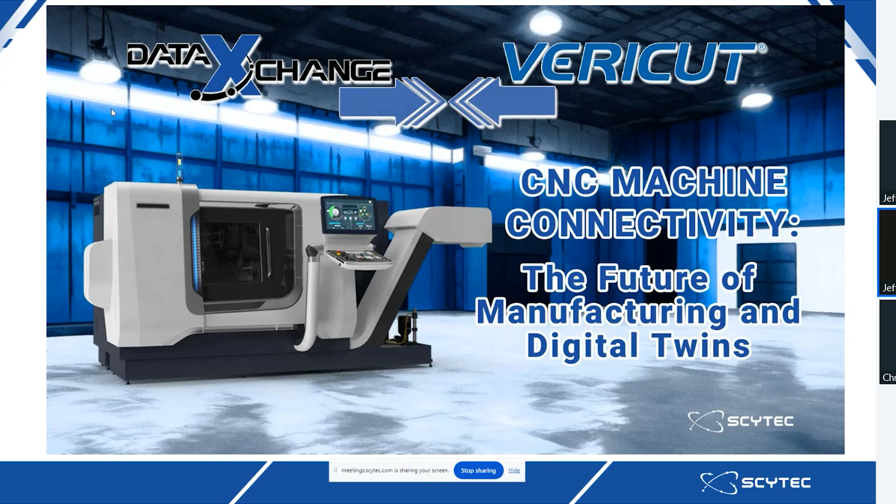So thank you all for joining us here today for a joint webinar between Scytec and CGTech concerning the integration between DataXchange Machine Monitoring and CGTech VERICUT, the standard in digital twin simulation verification. And the topic of this morning's webinar is going to be CNC machine connectivity, the integration between the aforementioned two software platforms I just mentioned, and what that holds for the future of manufacturing and digital twins.

So for those of you that are new here at Scytec, we have a monthly webinar concerning something related to machine monitoring, smart factory technology, etc. Normally about DataXchange related topics, but this morning, we actually have a very special guest with us from CGTech, Mr. Jeff Voegele, who is their VERICUT product specialist. He is going to be doing some demonstrations about the three different modules inside of the CNC machine connectivity integration, which include Precheck, CNC machine monitoring, as well as Postcheck.

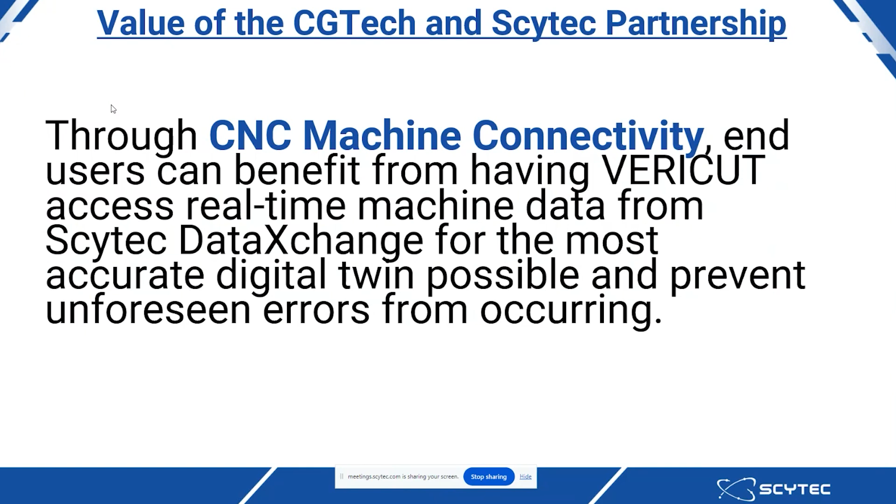Now, even with VERICUT, you're going to be left with some questions that still need to be answered, such as, the simulation ran without issue, but then when you got to the shop floor, some problems had arisen. And let's say you weren't even on the shop floor at all, and when the NC program had run, did anything negative happen? As well as other questions like, is my CNC machine running as fast as it can? Is it running at full capacity, 100%? And how much longer until the part is finished machining?

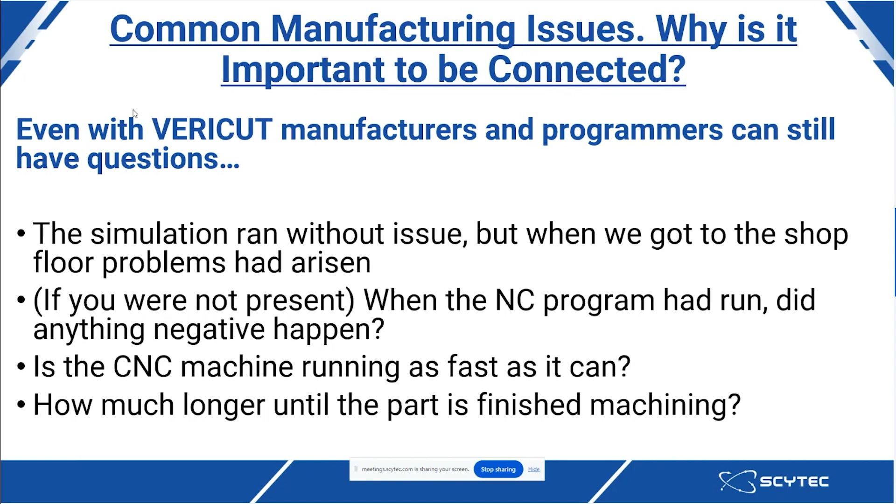Some other questions include, were tools in the machine set to the correct lengths? Were any e-stops or negative unplanned events, did they take place while you were machining? Were feed rates or spindle speeds modified? And was the correct NC program or subroutine applied? Now, managers, NC programmers, and owners themselves are going to be asking different questions as well. And that could be, was the machine set up correctly to even run the job in the first place? And if ran on a different shift, did anything negative happen?

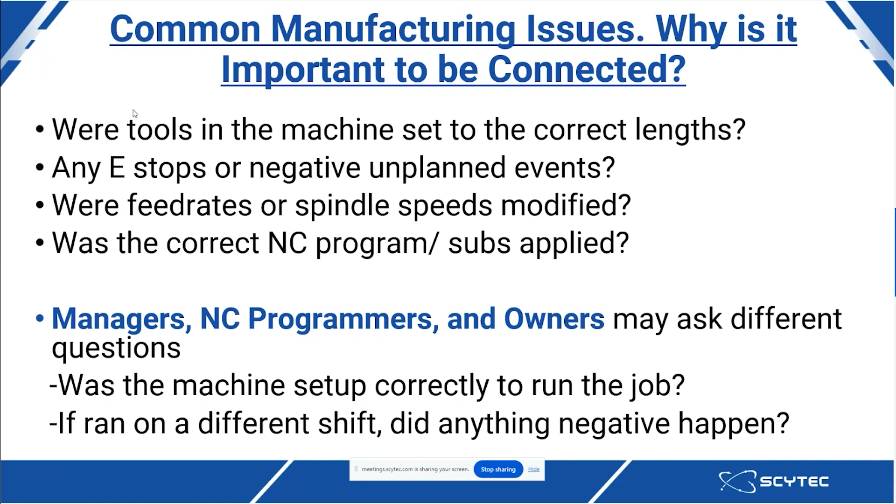So specific to what we are discussing here today, why is it so important to be connected to your CNCs out on your shop floor? And that can be summed up by saying that being connected bridges the gap from a CNC machine simulation that happens in an NC programming department to what actually happens out on the shop floor, providing a holistic, real-time, and historic approach to digital twins.

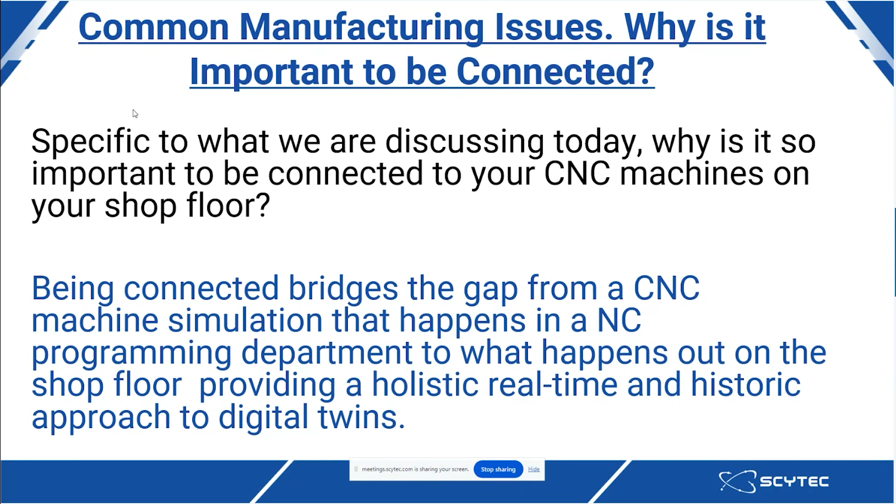So let's go ahead and get into the meat of this webinar and start discussing what is CNC machine connectivity. And before we really get into that, it's beneficial to have an idea of the foundation of this integration. CNC machine connectivity allows VERICUT to access Scytec DataXchange real-time machine data and shop floor analytics to take your shop floor to the next level. So if you're not aware, DataXchange is a machine monitoring platform.

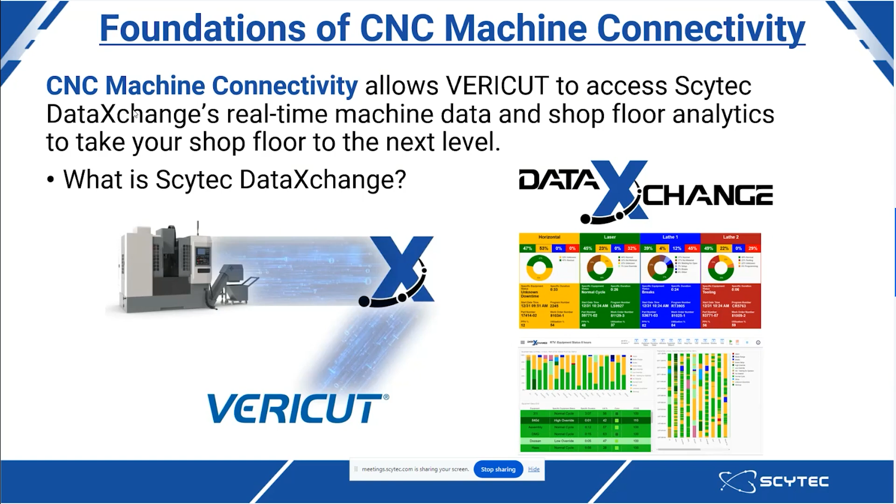So from here, I'm going to pass the torch over to Mr. Jeff Voegele, who is going to kind of just run over what VERICUT is and then talk about each of the individual modules and then show a demonstration. So Jeff, whenever you are ready.

Thanks, Jeff. So as Jeff had mentioned here, in case anyone's not familiar with VERICUT, we're the industry standard when it comes to CNC machine simulation and NC program verification and optimization. So our software, VERICUT, does a variety of things from detecting collisions and errors on your NC program and subroutines before you get down to the shop floor, finds any areas of inefficiency, and it also has capability to further optimize your program as well.

And VERICUT also has capability to do, as we mentioned, CNC machining, additive, as well as composite programming and simulation, just to give you an idea of what VERICUT is. You want to go to the next slide, Jeff?

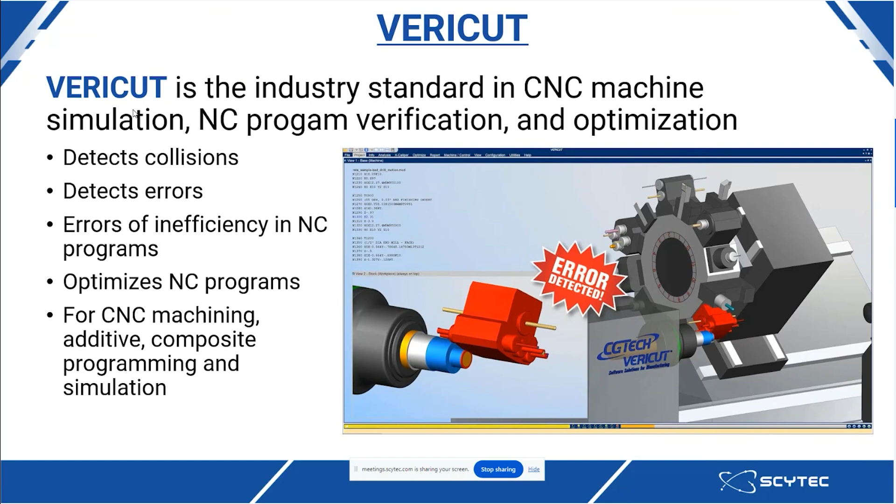So as Jeff had mentioned, CNC Machine Connectivity is a partnership between Scytec's DataXchange software and our VERICUT. So the way this works is DataXchange is connected to the real CNC machine down on the shop floor, and it's gathering that information to put up in its various displays and whatnot. And then VERICUT connects to DataXchange for two-way communication.

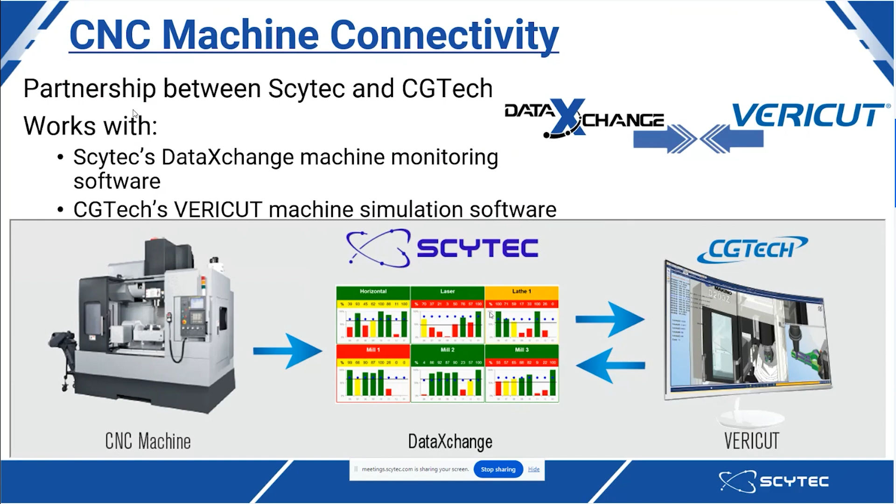And we'll explain that in a little bit more detail here in a few moments, but there's notifications and everything that go back and forth, as well as data that you can use within VERICUT. But that's in a nutshell how our CNC machine connectivity works. If you want to go to the next slide again. Yeah, I'm there. Okay.

So CNC machine connectivity consists of a few different modules. There is CNC Machine Connect, which consists of CNC Precheck as well as Precheck within VERICUT. So CNC Precheck is a standalone application that acts as a go or no-go gauge down by the operator. So you can have this software loaded on as many computers, laptops, or Windows type tablets as you want down on your shop floor to use.

And then Precheck within VERICUT gives you a little bit more functionality to investigate issues on these 5 key data points that we'll show you here in just a few minutes. And then there's a second half of this, which is CNC Machine Monitoring. So that consists of 2 parts where it allows you to connect directly to a machine and view how the machine is operating through a live stream within VERICUT.

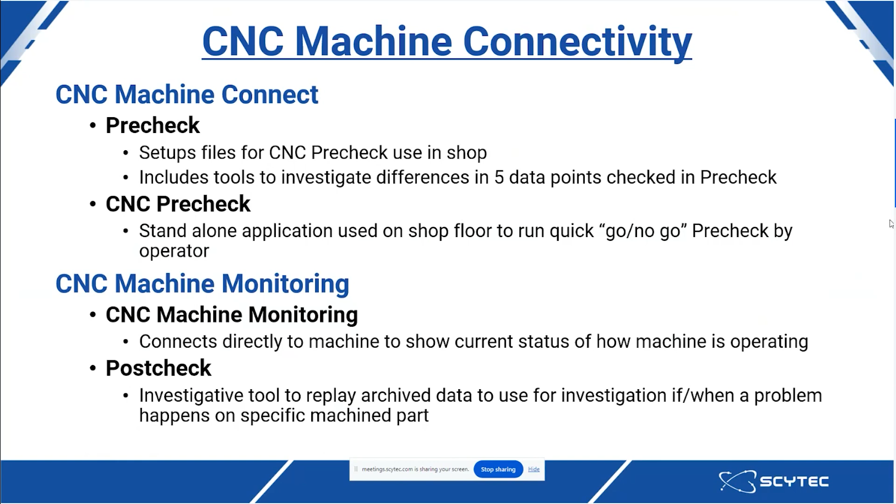And then the other side of that is what we call Postcheck. So think of Postcheck as an investigative tool: as serialized part numbers are being machined down on the shop floor, that data is being recorded of how the machine was behaving, how it was moving, parameters that were set, and whatnot. And then, should there be an issue down the road, you can go grab that data that was archived and replay that to investigate what happened should you have gotten a discrepant part or something like that. So that's the 4 modules that we're going to show you here in just a few moments.

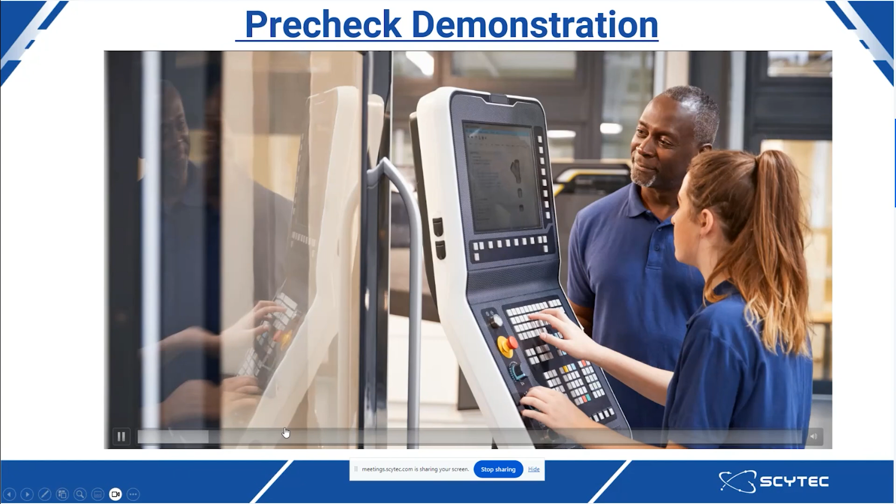So just tell me when you want me to go ahead and play. Okay, yeah, go right ahead. So we're going to start off, and I think it's best to explain these modules by how they fit into a workflow. So we're going to start off down on the shop floor as the operator.

He's got the machine set up. We've got the machine set up with a fixture, the stock modeled, all the tooling and the offsets are loaded, as well as the work offsets. The operator is ready to press cycle start, but he pauses for a moment and runs Precheck. And this acts, as I said, as a go or no-go gauge.

And what it does is it checks the parameters, the initial machine location of where it's sitting, the work offsets, the tooling offsets being used, as well as the NC program and any subroutines that might be in this setup as well.

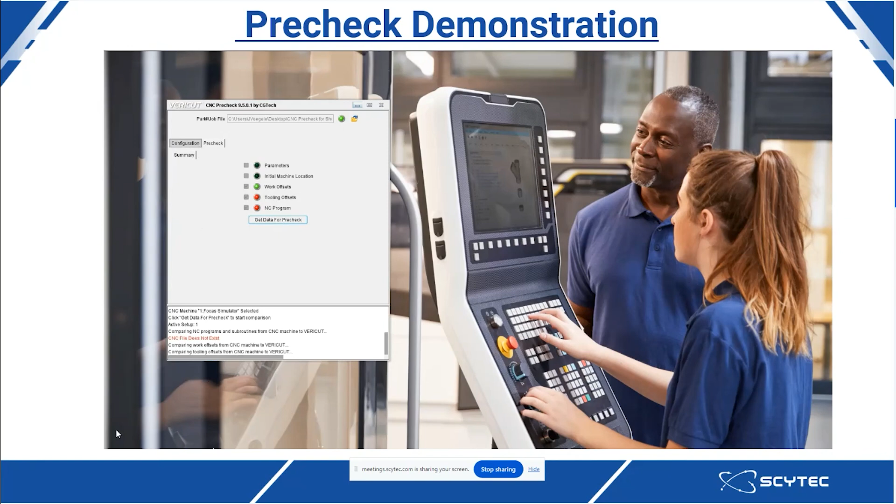And what you'll see here, you'll get an array of lights. So if the operator gets all green lights, this acts as an extra insurance that the CNC machine is set up and ready to run just as the VERICUT simulation, as well as the documentation that he got, had explained. If there's any red lights, that indicates differences in those key data points.

Now, in the background, there's also communication going on. This is that notification that I've been talking about that's going on between VERICUT and DataXchange. So here you can see that there's an email that's also sent to the appropriate parties, and these messages can be sent, as I said, by email, text, or even a Teams message. And in this case, we can see we've got a couple of red lights, so we need to address that before we move forward and actually machine that part.

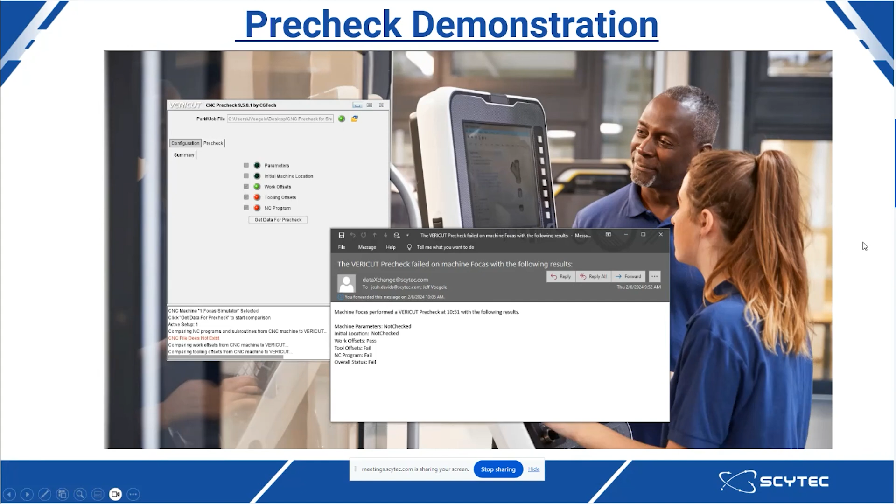So if you want to go to the next slide then.

Now, in this situation, we're transitioning over to the NC programmer. He's also received that notification that a pre-check was run and there are some issues to investigate. So within VERICUT, you can run that same check. You can see here we're looking at the work offsets, the tooling offsets, as well as the NC programs. And the advantage here in VERICUT is you've got some investigative tools to dig into this a little bit more. So even though the work offsets were green, we can see them all listed out here along with their values.

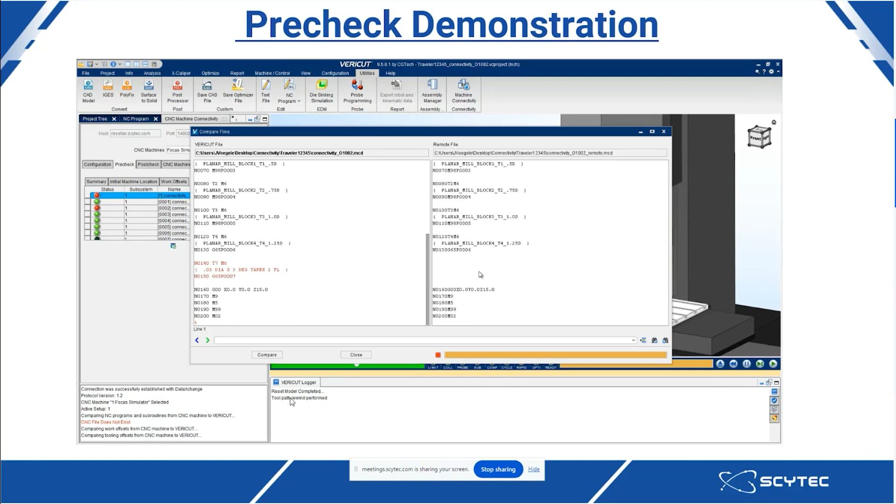If we look over at the NC program, we can see that there's a main program as well as a variety of subroutines. In this case, the reason that was red is the NC programmer didn't get the latest program revision down there. It looks like it's also missing a subroutine towards the bottom. The other advantage of the comparison functionality is you can notice the feed rate has been adjusted in the program that's down on the shop floor from what we originally sent down from VERICUT. So we'll need to address that as well. And that darker light just shows that subroutine that we didn't send down to the shop yet.

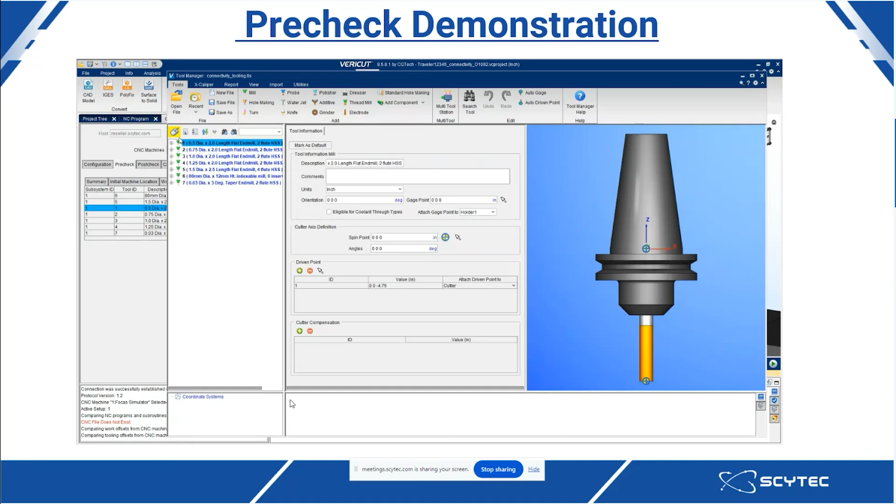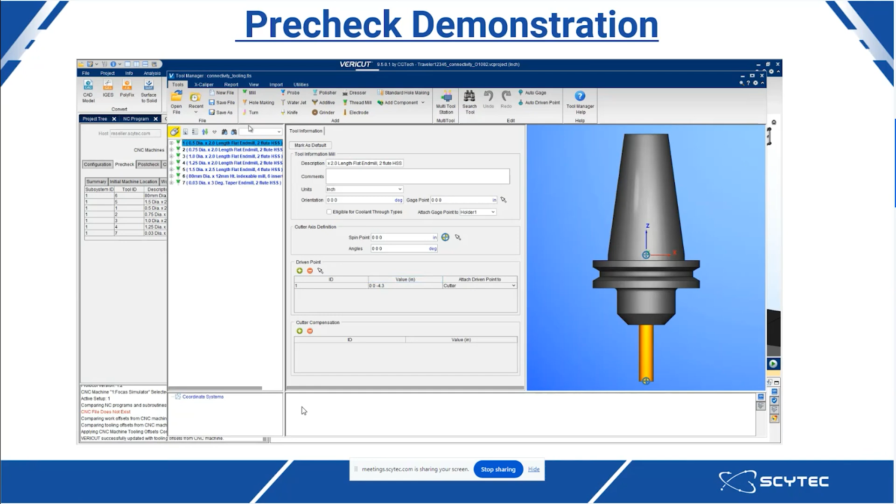Now, if we transition over to the tooling, we've got functionality that compares the tool lengths in VERICUT to the real tools down on the shop floor. And here there's a difference in the length of tool 1. So we can update that value from the real machine into VERICUT, and then go back and replay that simulation. Once we've updated it, you'll notice that tool shortened a little bit. That cutter was pushed up into the holder just a little. And now we're going to take that updated data and rerun it through a simulation.

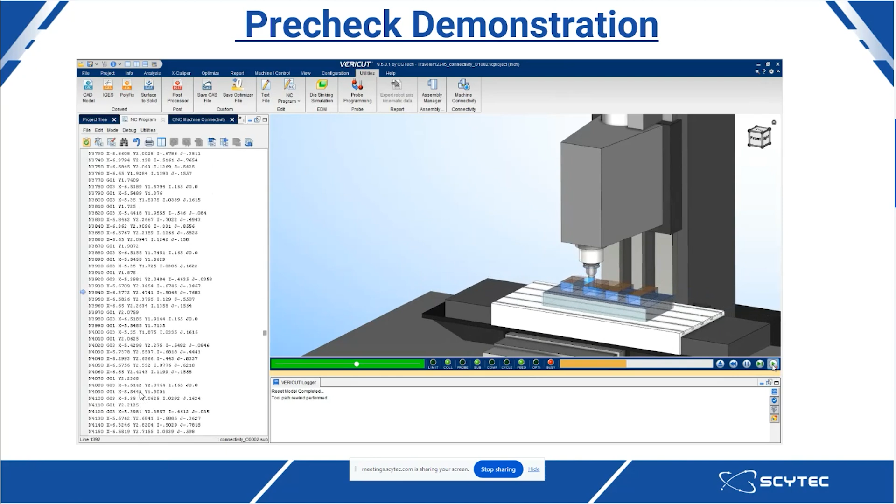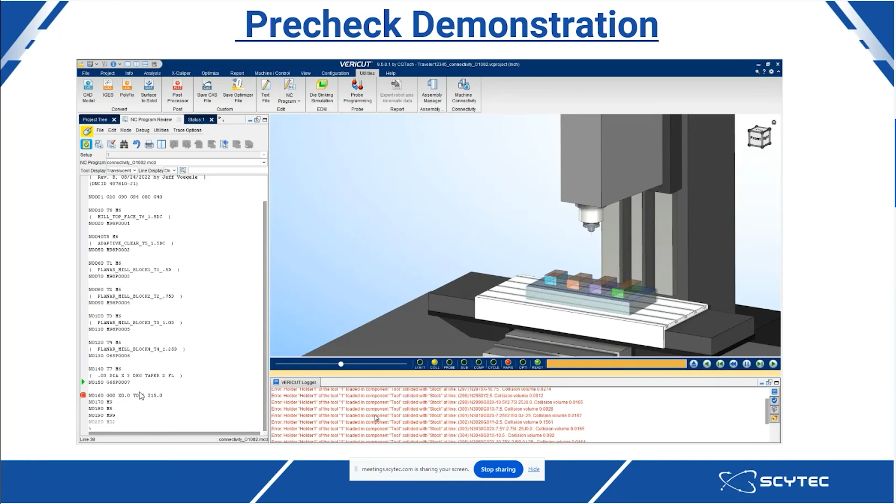I'll fast forward this a little bit for the sake of time, but we can quickly rerun the simulation using the data from the real machine within VERICUT, to see if we want to use that, or if we need to make adjustments, for example a tool length offset. As we fast forward, you'll notice a variety of errors popped up at the bottom. If we zoom in using VERICUT's program review, that shortened tool created a problem. It looks like we have a little bit of a rub on the part with the holder. So we're not going to be able to use that shorter length.

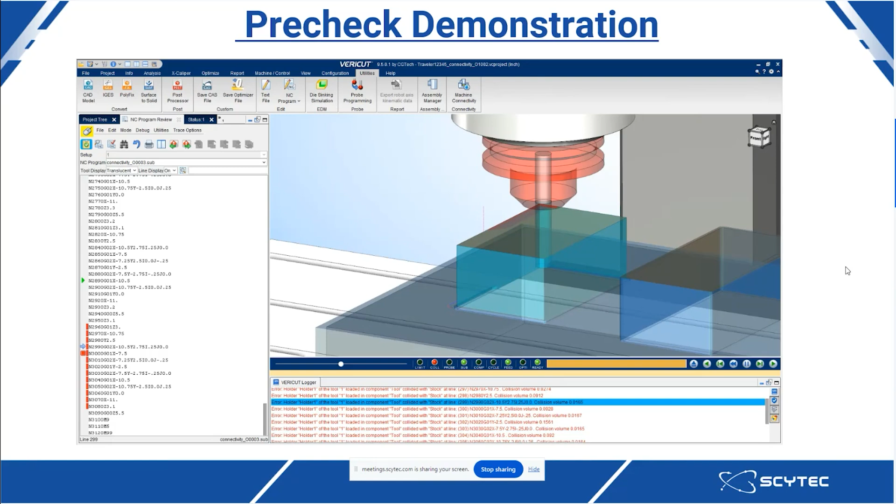So that's really the functionality you have within Precheck. You're able to run a Precheck down on the shop floor as a go, no go. And then the NC programmer has functionality to further investigate any issues within VERICUT and make adjustments as needed.

Now, if we fast forward a little bit, now that we've got the part running on the machine and we're making a series of parts, one of the next functionalities we have within VERICUT is CNC Machine Monitoring. This is where we can live stream data coming from the real machine on how it's behaving and running, and view that within VERICUT. So here I can simply make a connection, and it will pick up all the data points you can see displayed on our heads-up display there.

And it'll show the machine with feed rates and the NC block number that's being processed. So you can see the NC block number that's being moved around, the work offsets that are being run along with the tooling information.

And it also shows you all the overrides. So you can see that in this case, that override is dialed down a little bit to 90%. And you can see there's a variety of other information within our status window there on the left side with some of those green fields. Should the machine happen to go into any kind of alarm or e-stop state, all that information is shown as well, in real time within that live streaming capability.

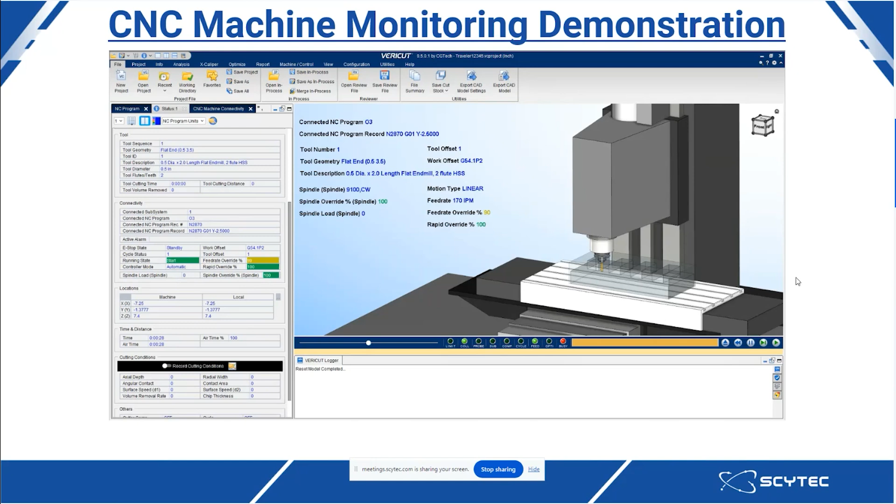Now, finally, if we transition a little bit further down in the workflow, we've been running these parts, a series of them, let's say 20 or 30 over the last couple of days. And yesterday evening, there's been an issue where I received information that we had a discrepant part. What happened? So that's where Postcheck comes into play.

So Postcheck, now I can go back into the archive data that we've been recording while DataXchange is running in the background, collecting all that information on how the machines are running on the shop floor. I can go back to a point in time, let's say yesterday at around 9:30 or so, and find out what happened on that particular part.

So I can grab a segment of time and replay those exact same data points that you saw within the live streaming, from the NC block to the tool number, the work offsets, feed rate overrides, spindle loads and whatnot. I can replay all of that in VERICUT to see how that part really ran, and then use that to find out what happened.

Maybe somebody changed a program, maybe a tool was adjusted as far as putting a replacement in and the length wasn't set properly, thus creating some kind of problem. So that's the power and advantage of having Postcheck, where we've got that data being archived for every part that's being machined down there. And then we can go back and replay that data and use it for investigative purposes if there's a problem, as well as for any further improvements or program optimization.

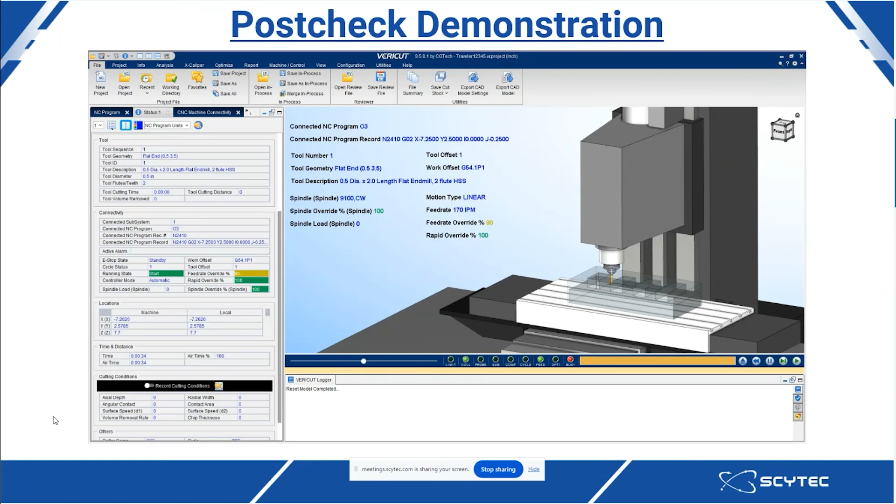So that is CNC machine connectivity in a nutshell.

Okay, well, thank you, Mr. Voegele, for showing us CNC machine connectivity. From here, I would like to discuss what the current support for CNC machine connectivity looks like.

And as of right now, we have quite a few different machine control types that are supported, including the FANUC I series, which consists of the 0, 30, 31, 32, and 35i, as well as the Makino Pro 5 and 6, some DMG control types, as well as the Okuma OSP 300 and 500 series.

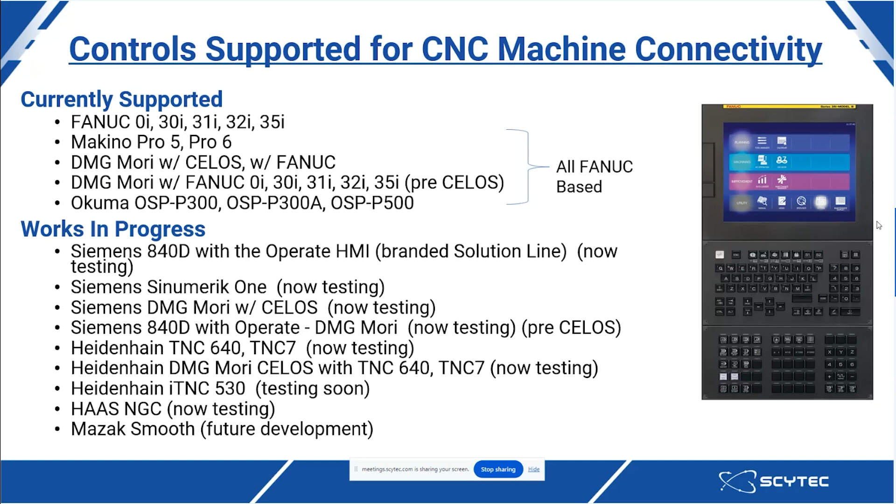And on top of that, we have quite a few works in progress that are either now testing or soon to be testing, including the Siemens 840D, the Siemens Sinumerik One, some Heidenhain common models including the 640 and the TNC7, the Heidenhain ITNC 530, as well as the Haas next generation controls, and finally the Mazak Smooth.

So what does implementation look like for this? It's actually a lot easier than you might think. Owning or having VERICUT and Scytec DataXchange are kind of must-haves for this, but really any modern machines that support Ethernet capabilities, with the ability to be on either a wired or wireless network, is really all that we require.

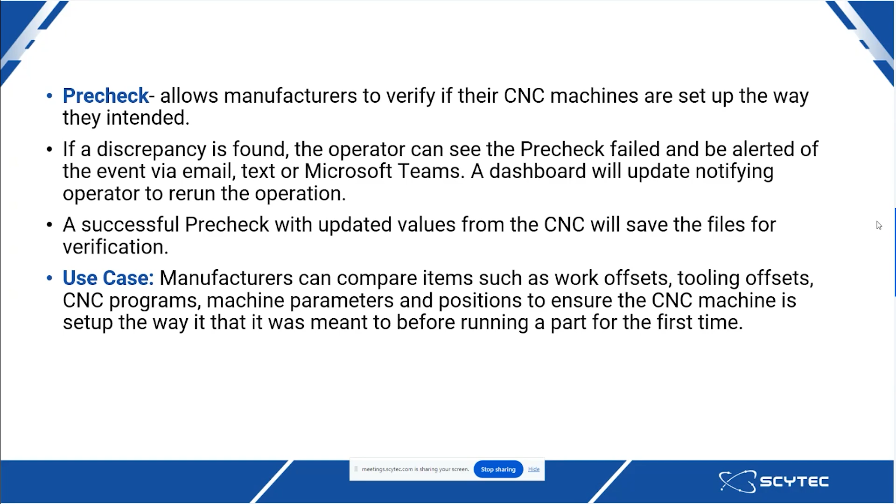And a use case for Precheck would be manufacturers can use it to compare items such as work offsets, tooling offsets, CNC programs, and machine parameters and positions to ensure the CNC is set up the way that it was meant to be before running a part for the first time.

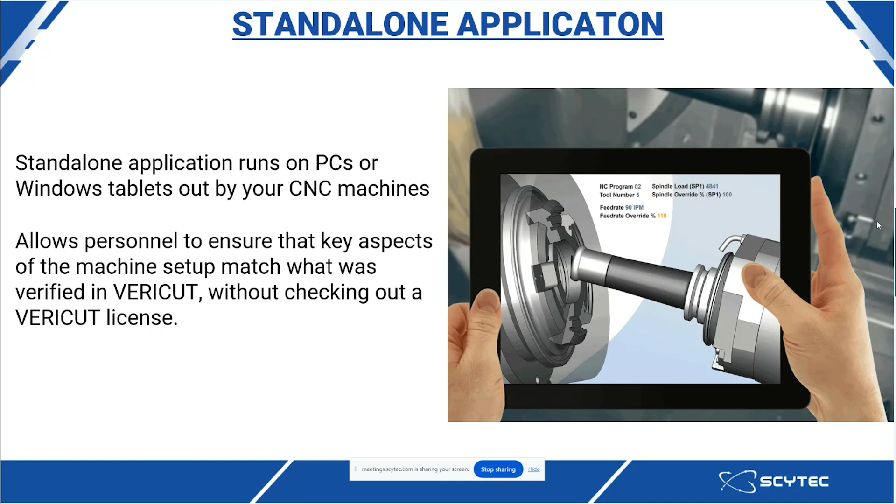There is also a standalone application for Precheck. It runs on PCs or Windows tablets out by your CNC machines, and it allows personnel to ensure that key aspects of the machine setup match what was verified in VERICUT without checking out a VERICUT license.

Next, we will go back to the CNC Machine Monitoring live streaming feature. This feature enables real-time streaming and monitoring of your machines directly within VERICUT, continuously updating the connected VERICUT session with real-time data, including axis positions, cutting tools, active tools, and work offsets, as well as information on the machine's performance and behavior.

Some use cases for CNC machine monitoring: this allows manufacturers to view past the machine enclosures, the guards, the flying chips and splashing coolant you see during production, to view where that tool is currently at in the process, as well as seeing what cutting tool is active or what work offset is currently loaded, giving insight that other manufacturers would be operating without.

And if you're unable to be physically present by the machine, you can easily get answers to questions about your machine's current status with just the click of a button.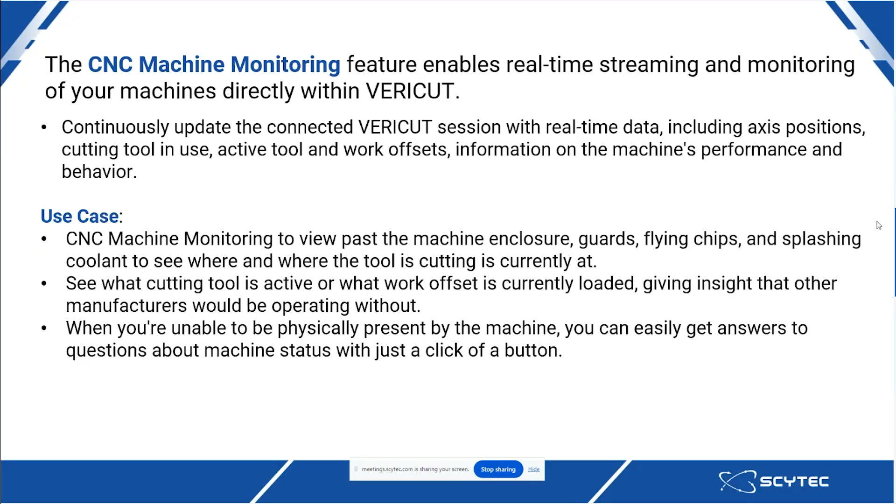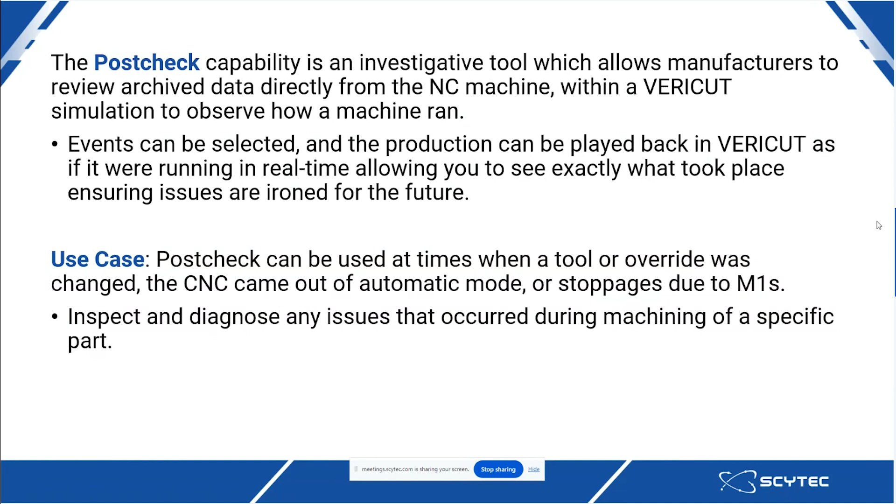A good use case for this could be Postcheck being used at times when a tool or override was changed, or the CNC came out of automatic mode, or common stoppages such as M1s happened. This allows you to inspect and diagnose any issues that occurred during machining of a specific part.

So if you're interested in this, we definitely ask that you reach out to us, and I'm going to go over quite a few different ways that you can do that.